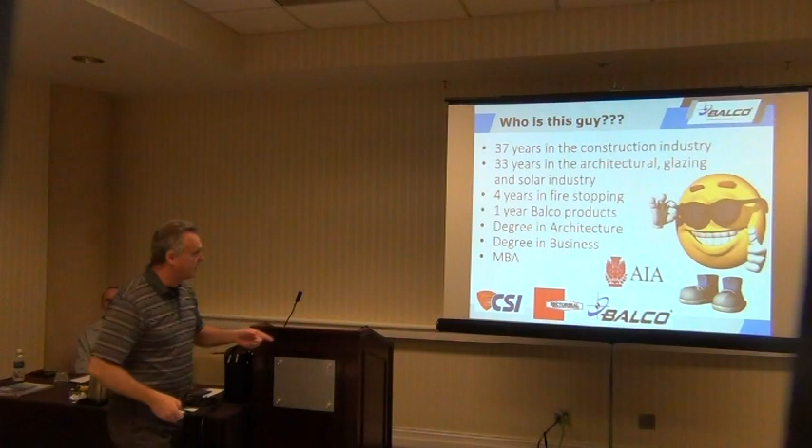My name is Scott Benson, and this is my resume up here. Your program will say Joe Bidwell. Joe left the company a couple, 3 weeks ago, so as they say, I'm the draft pick to be named later. So that's who I am.

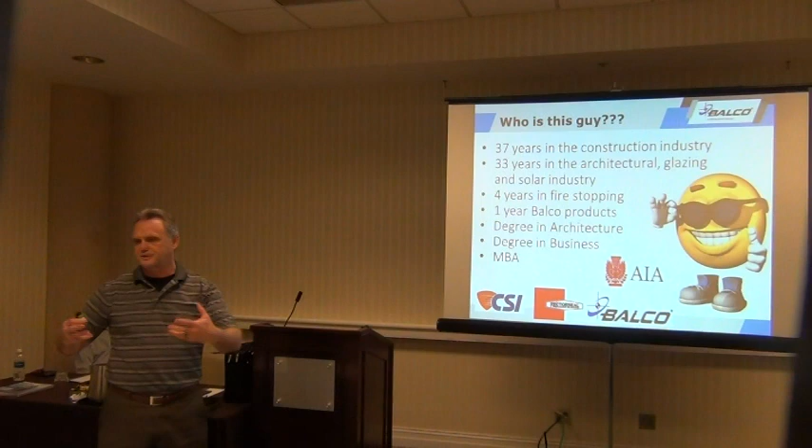I've spent a lot of years in the construction industry. It started when I was a very young person. My dad was an iron worker in Chicago, a union iron worker. I grew up seeing plans in the back of his pickup truck and all kinds of stuff for reinforcing concrete. I worked with him one summer, and that was all the incentive I needed to stay in college. It was definitely something I did not want to go out and do like he did to raise us. So I elected to stay in college, which made me a glutton for punishment.

I did earn my degree in architecture. When you graduate, you know one thing, and that's how to get to studio and produce work, and you leave. So I wanted to know a little more, so after I graduated I went back to school and stayed for a while.

So really what that does is allow me to bring all these parts and pieces in here and talk to you guys about expansion joints. That's what we'll do for the next little while.

Just so you know, Balco is a local company here in Wichita. The manufacturing, nearly 100% of it, is done here. What I do for Balco is work with architects and engineers. I do the same thing for one of our sister companies, RectorSeal, a fire stopping company based in Houston. Someday I'll have Greco aluminum railings responsibility too. So when I go into an architect's office, I'll say, hey, I have this, this, and this. Here's my portfolio. How can I help you guys?

Then one of our other companies is Smoke Guard. If you're familiar with them, they make a unique product with a curtain that comes down to keep smoke either in your room or from coming into your room—elevators, things like that. It's pretty cool. But we're all held by one umbrella called CSW Industrials, a Dallas, Texas company.

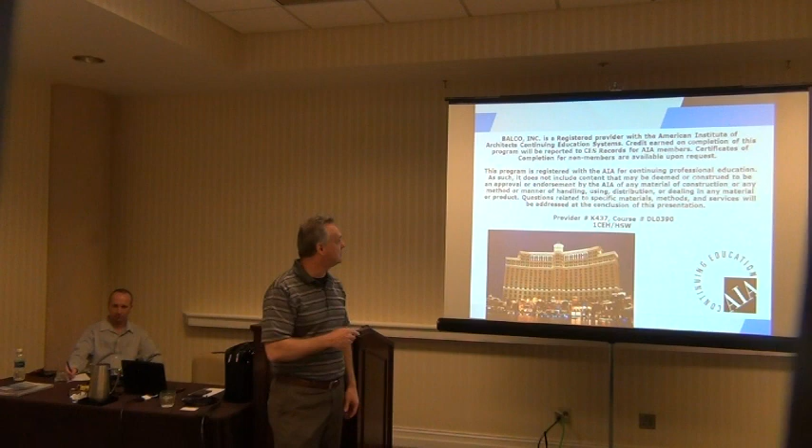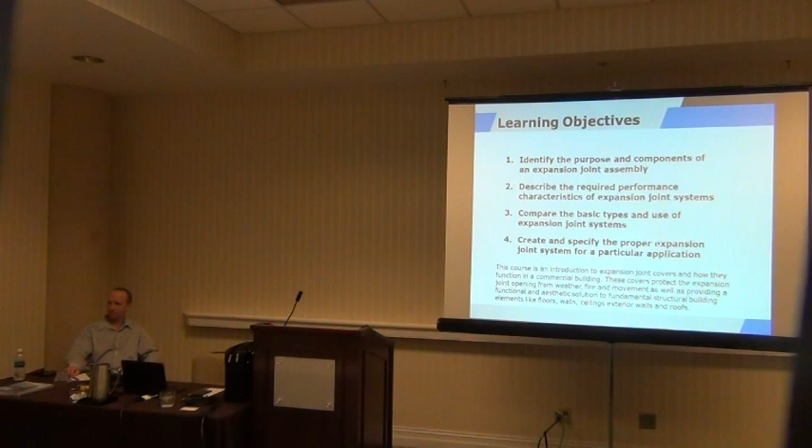I have a lot of parts and pieces up here. This guy is too heavy to pass around, but I'll move it over towards the center in just a moment. The rest of them are pliable and fairly harmless to handle—no sharp edges except maybe on the aluminum products. So we'll take a look at these as well. If you want me to pass them around, we will. If you don't want to see them, I'll just lay them out here and you can take a look whenever you feel like it.

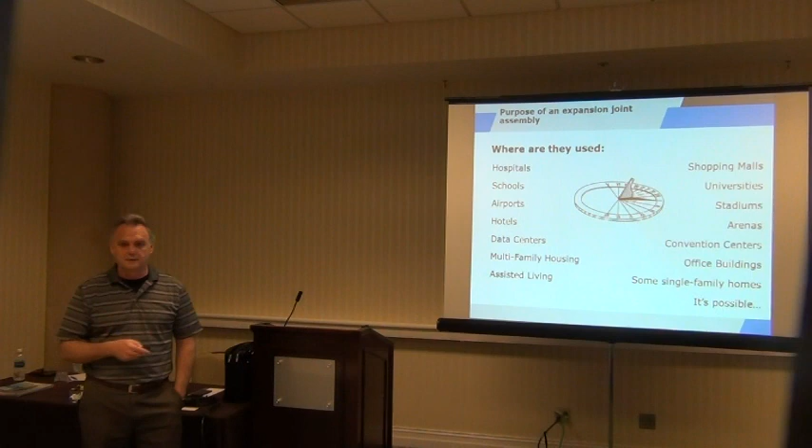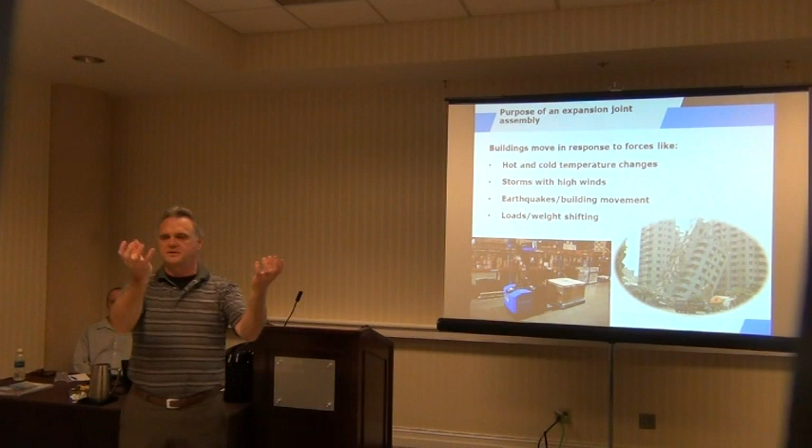Expansion joints go into commercial projects—just about every commercial project, buildings like this, airports, large hotels, resorts, those types of things, any type of commercial project, and some single-family homes, believe it or not, will get an expansion joint. What does it do? It allows the building to move—temperature swings, storms, the earth moving, all of these things can happen. So you have one large building broken up into several different pieces so they can move independently, which is what the expansion joint does.

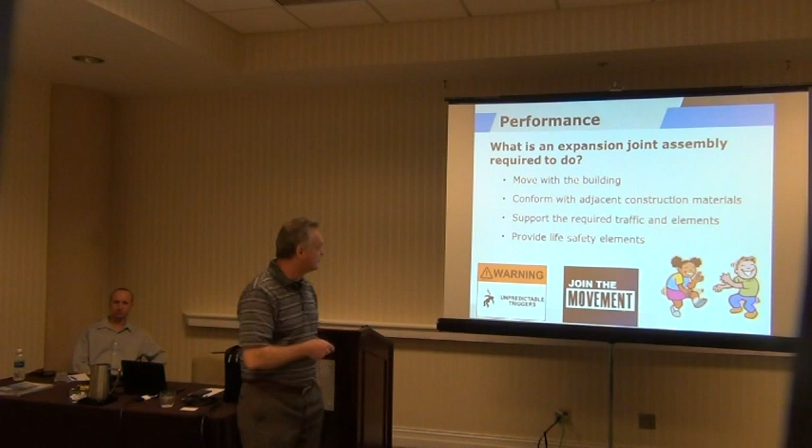That's to conform with the adjacent materials, so it's not just this material we want to talk about—we want to talk about all the other materials around it as well, and that assembly we're going to discuss in just a second. Supporting the required traffic elements is something big—we'll see an issue that came up with a project here in just a little bit. And then, of course, the most important one: provide life safety.

Fire ratings can be added to these items as well, so we'll talk about that. That's more towards the end of the session, but we'll go ahead and talk about it also.

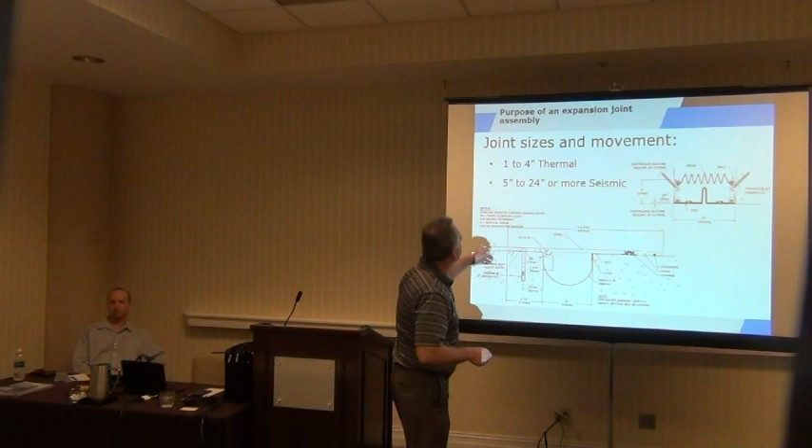So now, joint sizes and movements. This chart stated that anywhere between 1 and 4 inches is thermal movement. Some can argue that. You could say really up to 2 inches is a caulk joint. In California it is, because that's what they do. If it's 2 inches, a lot of times they're just filling it with caulk. Of course, that's probably a tube of caulk every foot, but that's okay because we sell sealants also. So that's good. But they have other seismic movements that go from 5 up to 24 inches.

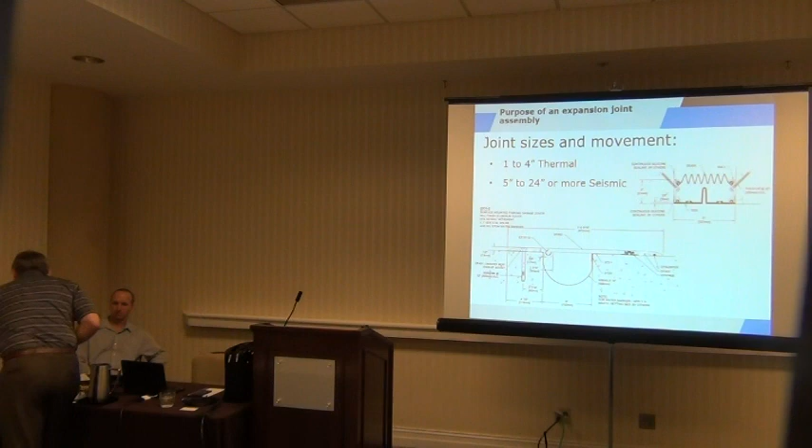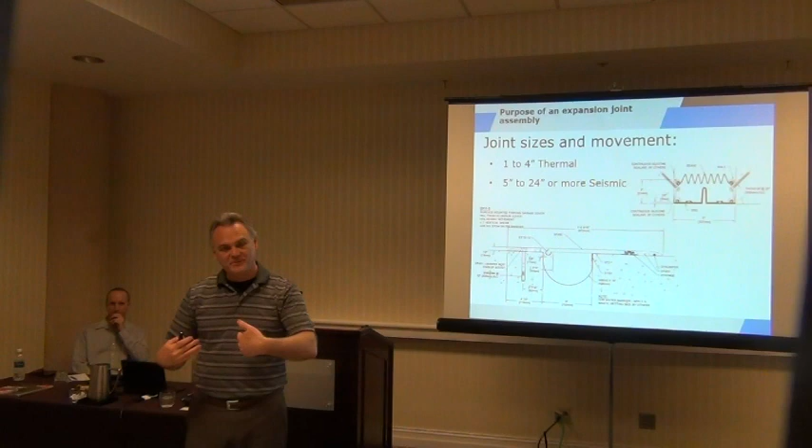Is 24 inches the maximum? No, it can go well beyond that. I was looking through our catalog yesterday. They did a great job creating this catalog for us. And I'm looking through it and I'm going, well, everything's stopping at 8 inches. Everything's stopping at 12 inches. Why? And they said, oh, don't worry about that, because we've done up to 36 and 40 inches before. All you have to do is talk to us about it. So when you see things like this in these catalogs, and they're showing you their maximum dimensions that they can do, don't worry about that. Draw what you want to, and then let us figure that out. And if we can't, then we'll come back to you and say, all right, well, here's our limitation on this condition. We'll take it from there. But that's what makes the job fun, the challenges.

So now, I'm originally from Chicago. I live in the St. Louis area, so I always do things to keep your attention. So how do you divide up a building and show it? I just showed a block of cheese. It's a piece of California cheese. It's not from Wisconsin because I'm a Bears fan. And we don't like the green and yellow team from Wisconsin, so 11 months out of the year we don't acknowledge them. February just ended, so now I'm into the we don't acknowledge them phase.

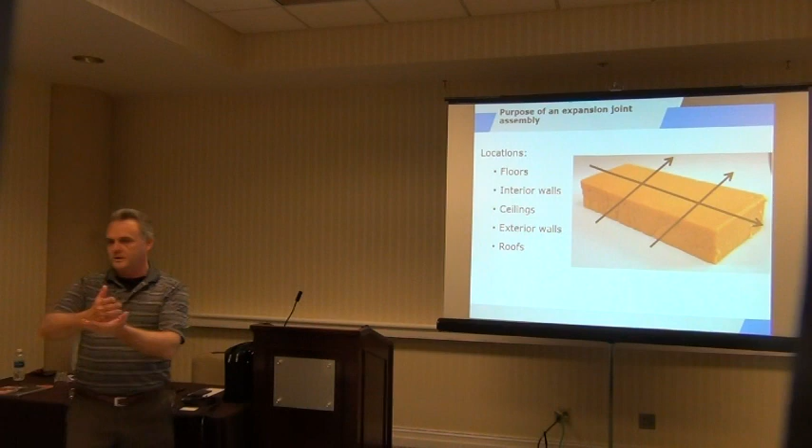So here's what they do. They take this one large building, create sections, let the pieces move independently, but cover all of the gaps. So that's what we're going to do. But it goes through the floors, the interior, the exterior walls, all the way through the ceiling is what you have to do.

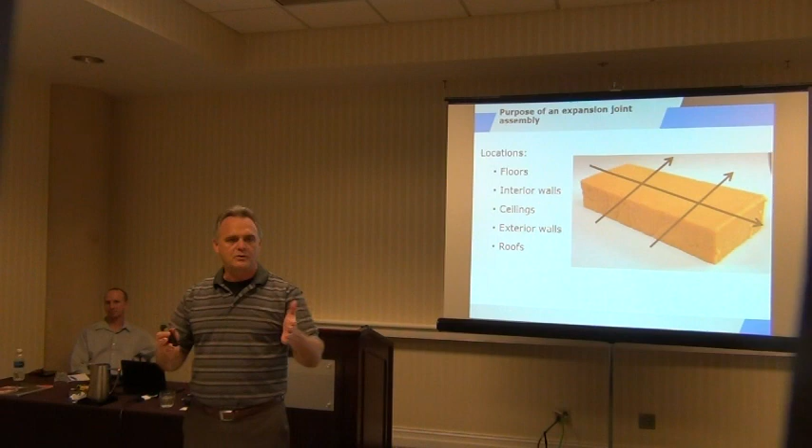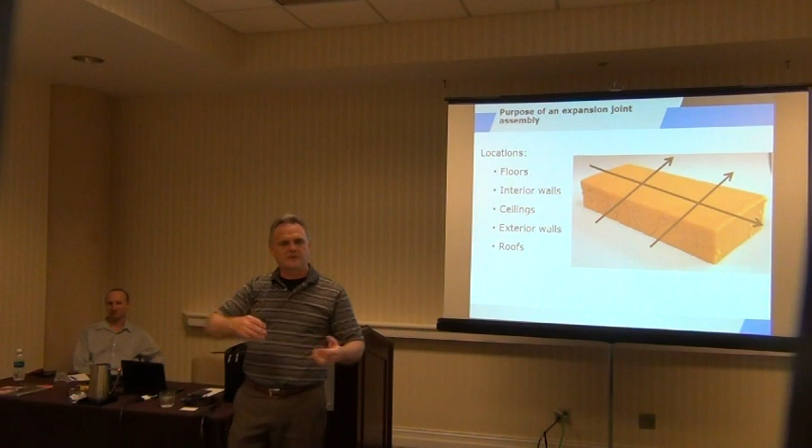So now, is it a straight line? Is it one simple array? Not all the time. Tony and I, this is Tony Hull, a co-worker of mine in Wichita, he came over to answer the really hard questions. So challenge this guy. But we were just talking about this and slicing through. I showed it as a straight line, but it's truly not what's going on in the design world now. Now they want irregular shapes. And so now the line doesn't go straight through the building. It'll go this way and turn, make a 45-degree angle, make another turn, do all these things. So it creates more challenges for Tony, for us, and for the architectural world. And then for contractors to actually build it and install it.

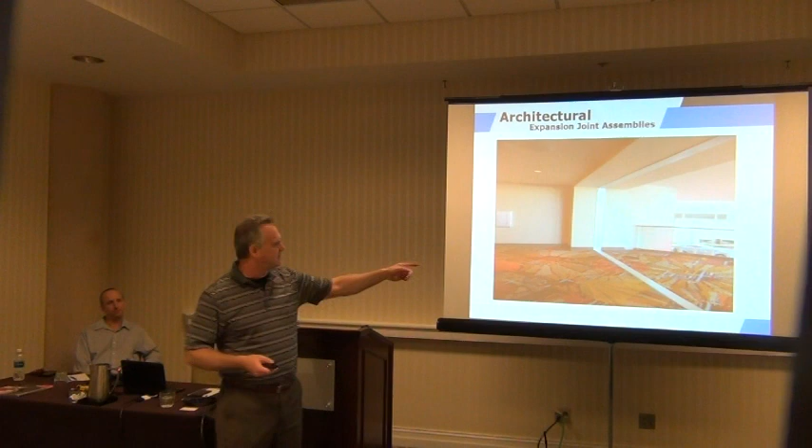But does it have to be as obvious as that? It does not. There are components that we put into the assemblies that can hide these things. Make them a little less noticeable is what makes it great.

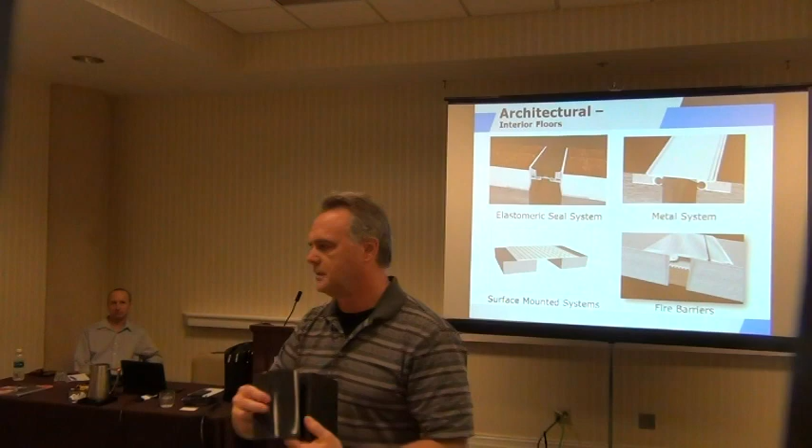This is a Santoprene material. Silicones are available, EPDMs, other things like that are still available. I'll go ahead and send this around so you'll get an idea of what this is. A lot of this can be used in floors. It's used in walls quite a bit.

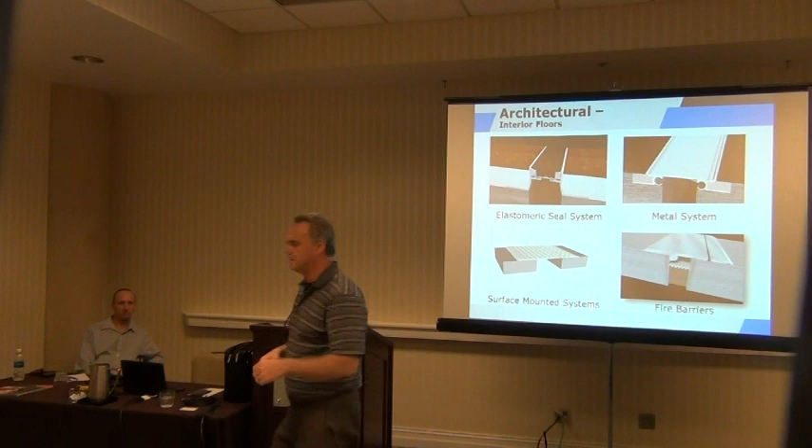So floors, a couple different types. The other type is the one on the right, more of a straight aluminum system. That's what this is, it's all put together. You can mess with this one. It's not a static piece, so you can accordion it and watch all the parts and pieces move. We'll go over the names for these parts and pieces in just a minute.

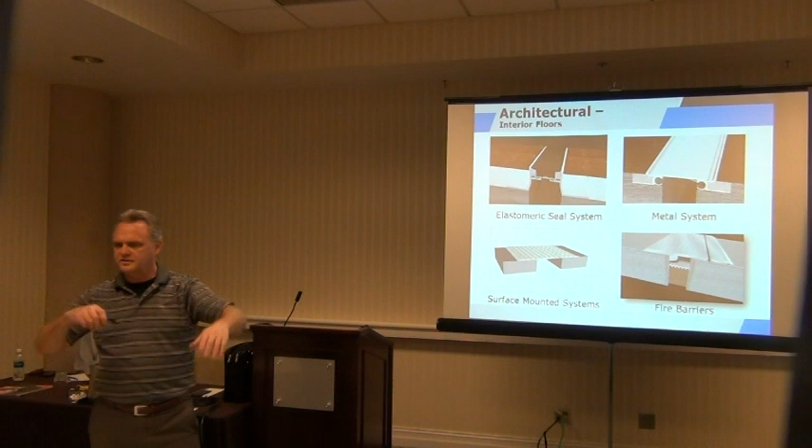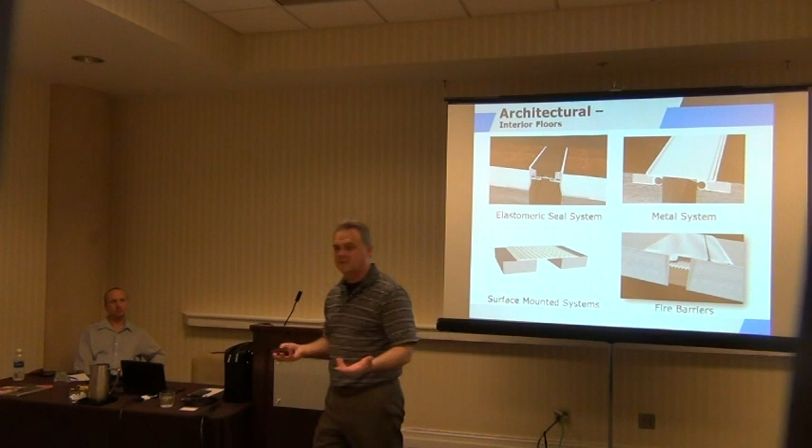These are all systems that would be recessed into their areas. You also have surface mounted. So if there was an existing project where everything's already in place, you don't want to hammer out and re-pour concrete. They have surface mounted systems that you can just set and place right on top of the concrete or whatever the substrate is. Then there's also heavier systems. This happens to be for a garage, and it shows the fire capabilities of this, its ability to stop the spread of smoke and flames. So these things are all available.

So now here's a picture of what's going around right now. A couple of terms: you have a cover plate, you have a center bar. If you look right down the edge of that, you'll see a center bar inside there. As that is accordioning back and forth, that center bar comes into play. So that's what holds everything together.

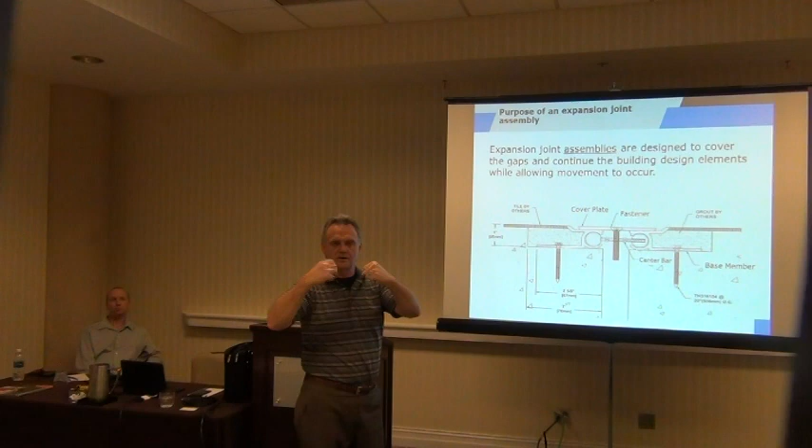Once it expands, it can also contract and come back. Then you have the base member, that's the bottom piece, and that is recessed into the concrete. So you have the concrete here, they have a block out, and all of that assembly is installed after the fact. They pour all this concrete, they pull the block outs out.

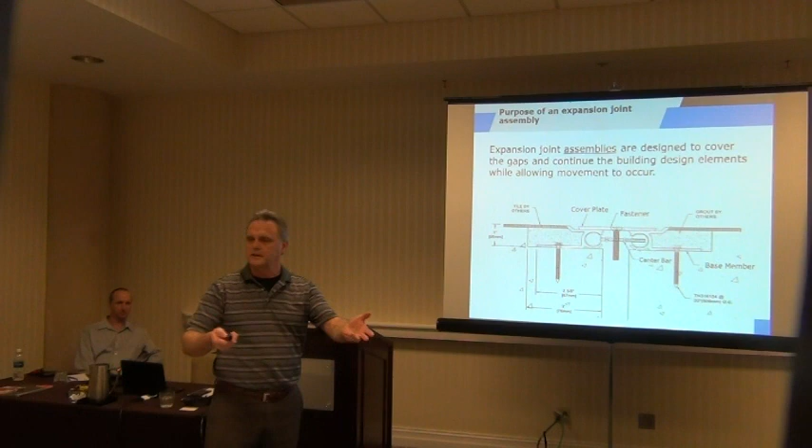Later on in the construction phase, they can go ahead and install the assembly. So now, this just happens to be a different assembly down here, but the same thing - it's a recessed part right here. So the base member, cover plate - this doesn't have a center bar, just a different system, as opposed to a cast in place.

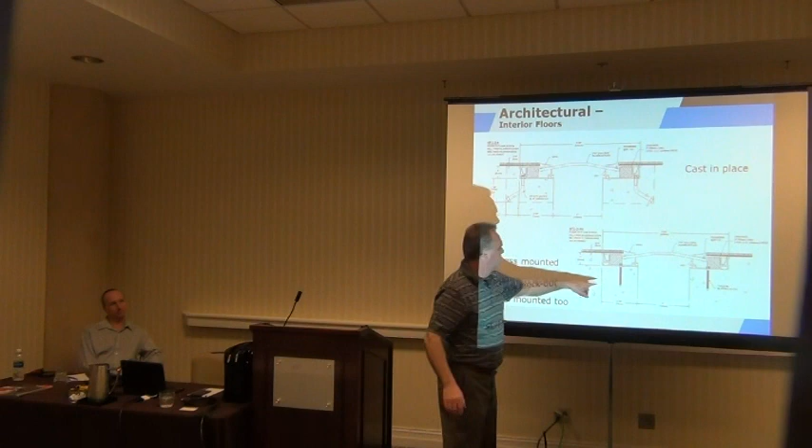The problem with the cast in place is that really the problem is you have to cast it in place. That's the issue with it, because now it's in place. Years go down, something happens, maybe they had an earthquake that damaged the assembly, so now you have to remove it. That cast in place is going to be very, very difficult to remove and try to replace. Where the simple recess system - pull the fasteners, remove all the parts that are bad, replace them with new parts, put your fasteners back in, and you're ready to go. That would be much, much more difficult with a cast in place. So we really don't see cast in place done very often at all.

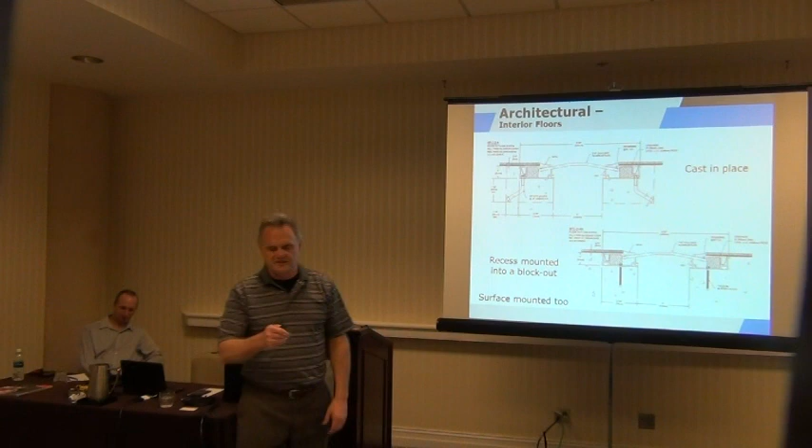Do you have any idea what the percentage of business would be covered within a few single percentage points? 1%? Yeah, so it's almost never done. There would be that unique time where you would use a cast in place, but it doesn't happen very often.

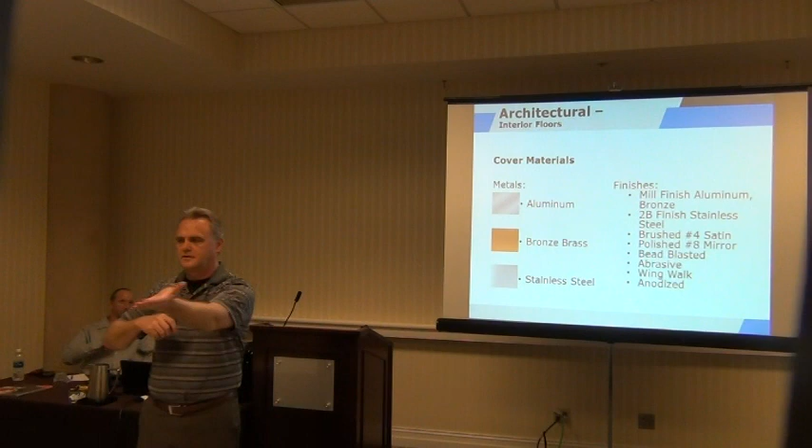Finishes - really any type of finish that you can imagine is available in colors. You could go with a brass cover, kind of soft, but also bronze, aluminum, stainless, anodized, any of these things. If you wanted it primed so it can be painted, you can do that. There are recess systems where the cover actually has a recess on it, so they can place the tile or the carpet right onto that cover plate. So it continues your view and minimizes the distraction of your view with that expansion joint.

I always got a kick out of 'wing walk.' You guys know what wing walk is? What a term to put on there for a finish. Isn't it an abrasive finish? Yeah, that is what it is. But I don't know why they just didn't call it abrasive.

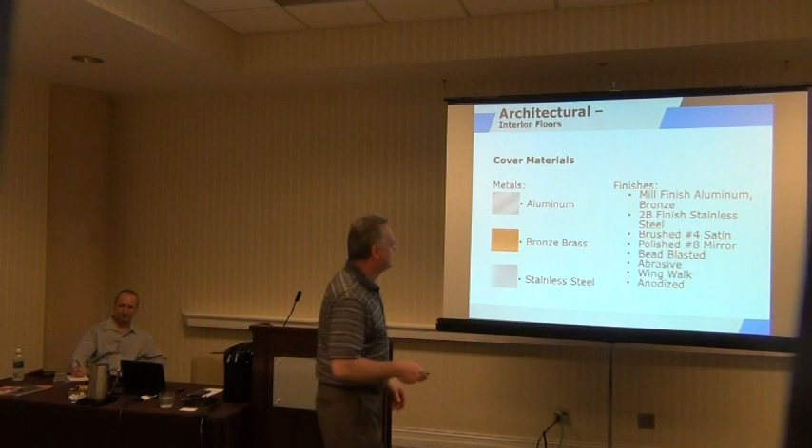That would have been a good idea. But it's something different, so they call it wing walk. I got to keep that.

So now, loads. This is something that's big with expansion joints because you have pedestrian loads, you have different loads, heavy duty, you have vehicles rolling over top of it, gurneys in hospitals, you could have a high lift in a convention center. When you walk down the hallway here, you'll run across an expansion joint, and maybe they run their high lift across there.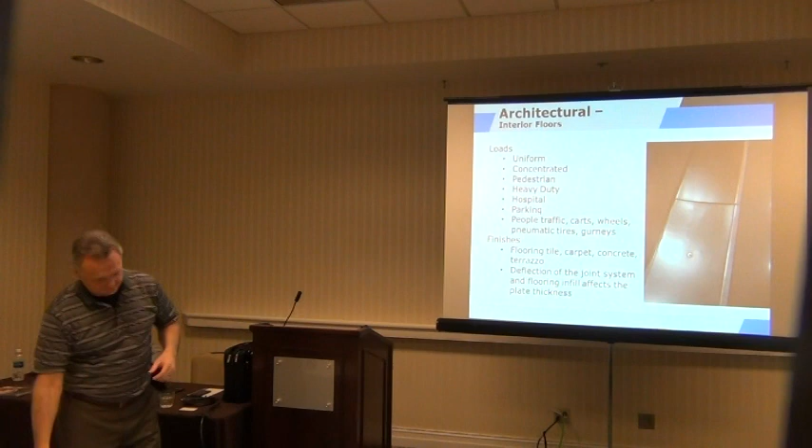Maybe the floor is not set up for that, so they don't allow it. But it didn't stop them in this building from running over top of that cover. So now if you notice, it is a concave shape. That's because it wasn't specified properly, or it was specified properly and then somebody drove something over it that wasn't supposed to go down that hallway. Maybe they weren't supposed to drive a forklift across that. They did concave the cover.

So specifying and having the occupants stick to that is always going to be a challenge.

So here's a chart that was created. It's on the last page of our catalog. Here you can see when the design loads are created, a pedestrian is a 300-pound live load with a 2x2 space that they're occupying when they walk. You can go right down the list and see all the other things.

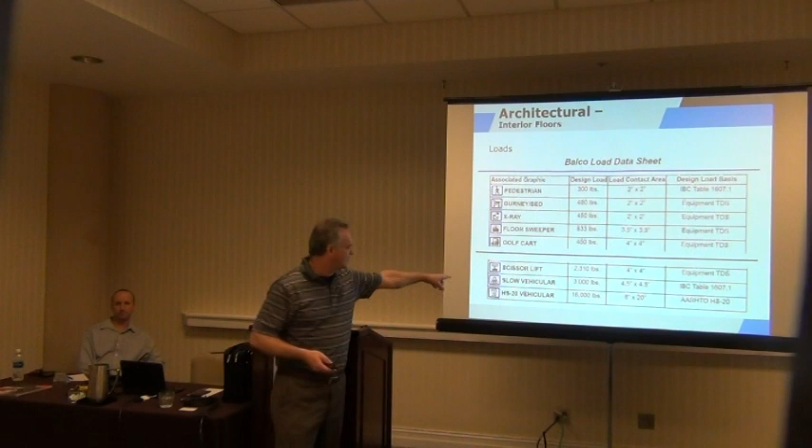So that picture prior, they probably specified this, and somebody did this. And that's a bad thing in our industry. Can it be fixed? Absolutely. So all those parts and pieces can be removed, primarily the cover plate, maybe the center bar. And then they'll reattach a thicker cover plate, something like that, to make that joint better and so they can drive their scissor lift across it.

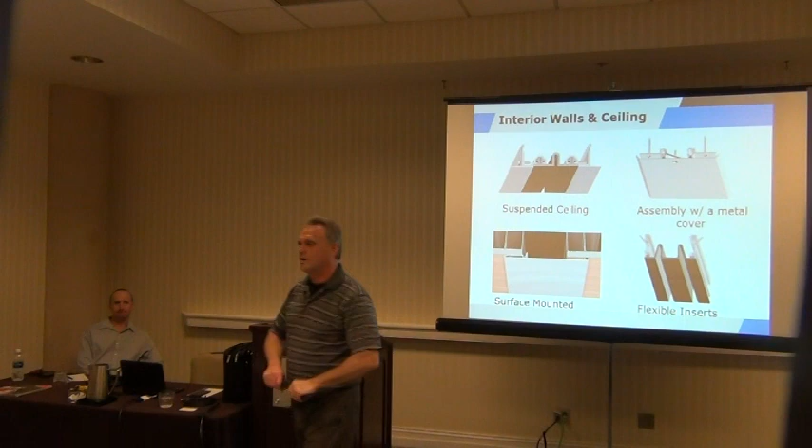What do we have? Interior walls and ceilings. So we're looking at the same thing. Here's another part that you can work with, we'll send this around in just a second. But really you're looking at the same parts and pieces, maybe more dense, more durable, thicker, same thing. You have your EPDM, silicone, Santoprene, you have your aluminum covers, surface mounted, flexible types, all of those things are available. So let's take a look at those.

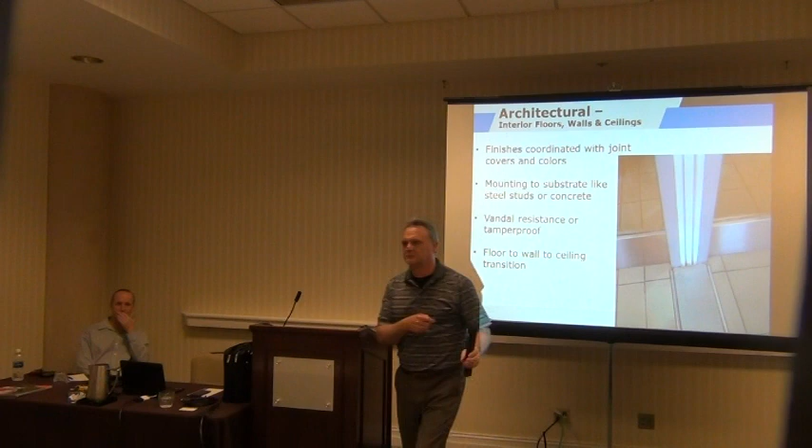Here, we're looking at a picture where the aluminum cover plate is coming up to a Santoprene wall condition, so you have to be able to transition that properly. We'll show you the drawings for those, because we'll give you a drawing of the floor system, a drawing of the wall system, and a drawing of how they transition to each other, because they have to still sit there in harmony since they're all going to move around independently. So we'll show you that drawing as well.

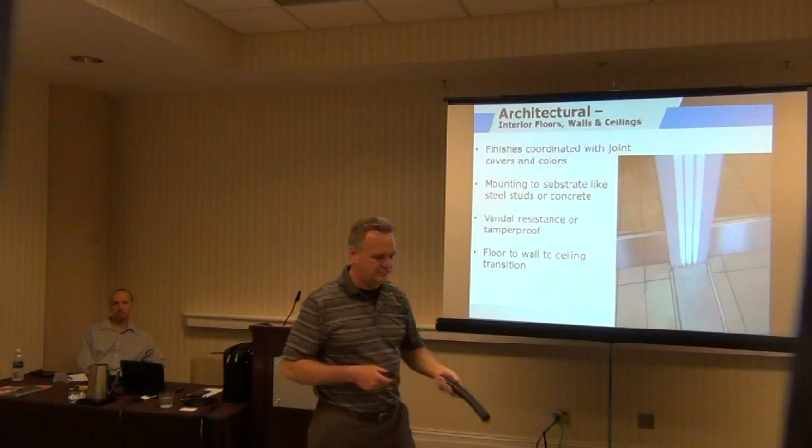But some of the things you have to look at if you choose to use something like this, I'll go ahead and send that around. First of all, you have to deal with the substrate: steel studs, concrete, wood, possibility.

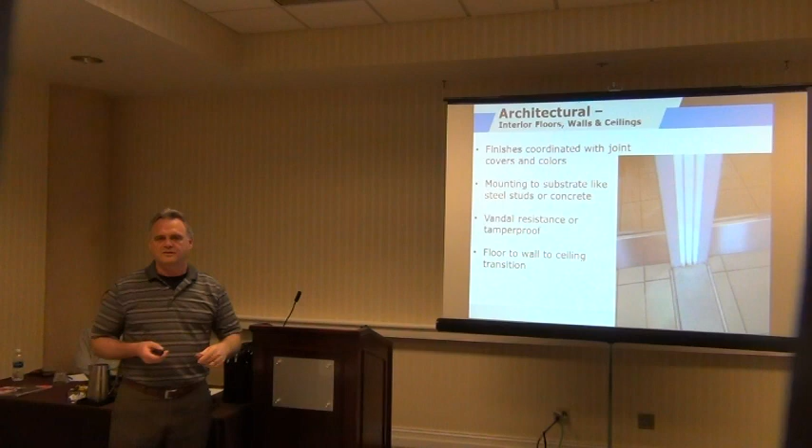But also vandal resistant and tamper proof. So if you're going to have something like this in the hallway of a high school, be ready, because as our little darlings are standing there with nothing to do between passing periods, they have their pen or their knife out and they're picking at this kind of stuff. It's not going to withstand that. So these things have to be taken into consideration. That would be one condition where you would not want that in a high school hallway, for example. Use a metal system similar to this or that.

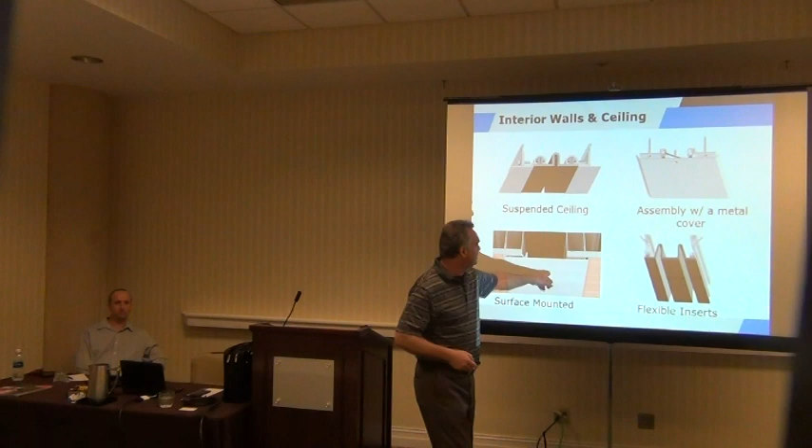And then, of course, colors, which we alluded to earlier. All of these colors are available. If there's something that you don't see in a color chart, all you have to do is ask your manufacturer, because most likely they have custom capabilities. If they don't, go ask a different manufacturer.

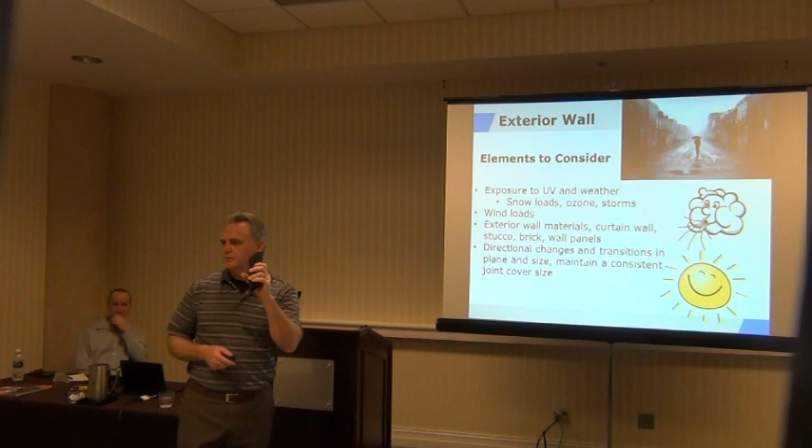So now, with your exterior walls, exposure to the elements is huge. Santoprene's great on the outside, but silicone is better. So if you had a silicone exterior joint, it's going to withstand the elements - wind, rain, the sun is a big part of it. But you have to take those things into consideration.

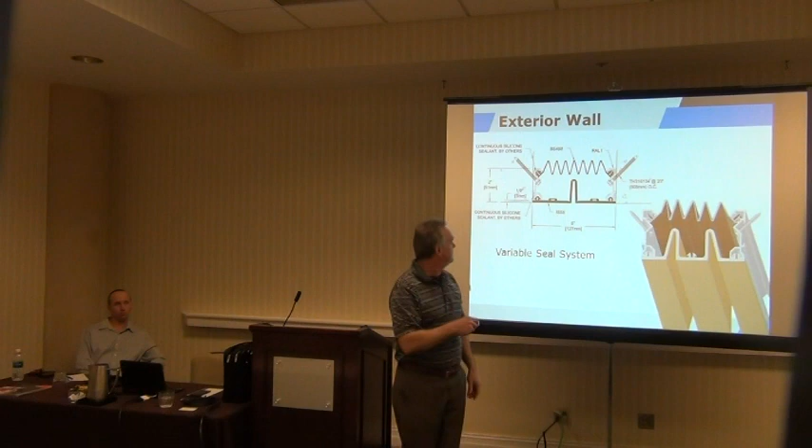Here's a shot of the exterior walls. Really, you're looking at that first piece that I sent around, this is what you're looking at here. I pulled it out of the frame itself. But they're using silicone here. Again, the best benefit for silicone is sun exposure. The second best thing about silicone is you can do very, very long runs - up to 100 feet with one piece of silicone. There's no joints. The joints, obviously, can let water in at times, you never know, but you get nice long runs with a silicone product.

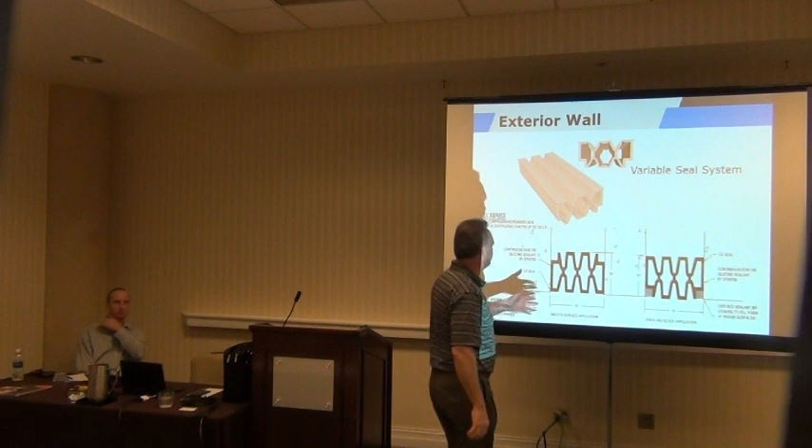That piece that's going around is exactly what this piece is right here. You'll notice that it has a notch on the inside. You have a nice smooth surface, you can have that notch facing in, minimizing your sealant right here and here. However, if you have brick, split face, concrete block, anything like that, you have a few idiosyncrasies in there. You may have some irregular shapes. All you do is take that piece, flip it around, and now you have a nice bed of caulk right there to accommodate all those changes that may occur in the construction phase. So those are pretty handy.

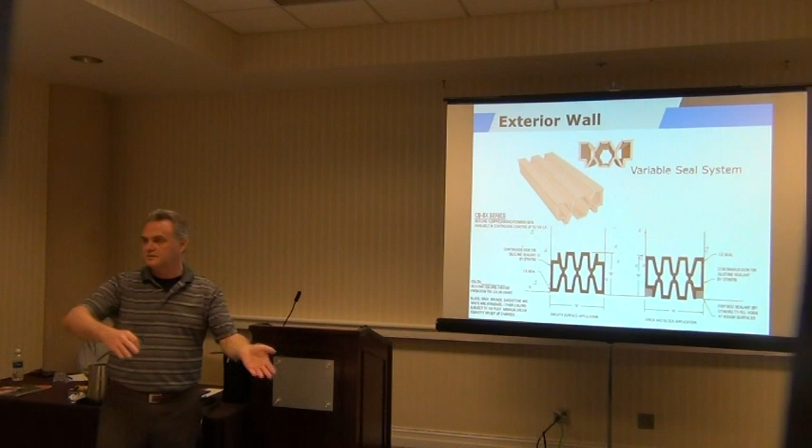So all of these systems are available to meet your needs. There's not just one, and you open the book and go, okay, how can we make this different to accommodate them? All of these options are available to you guys.

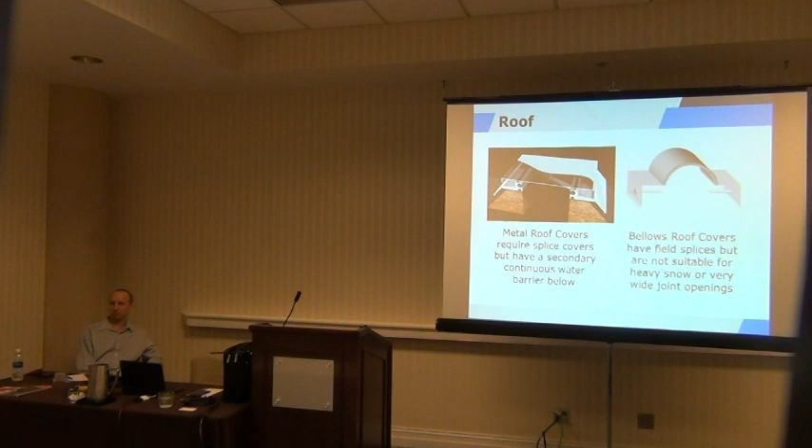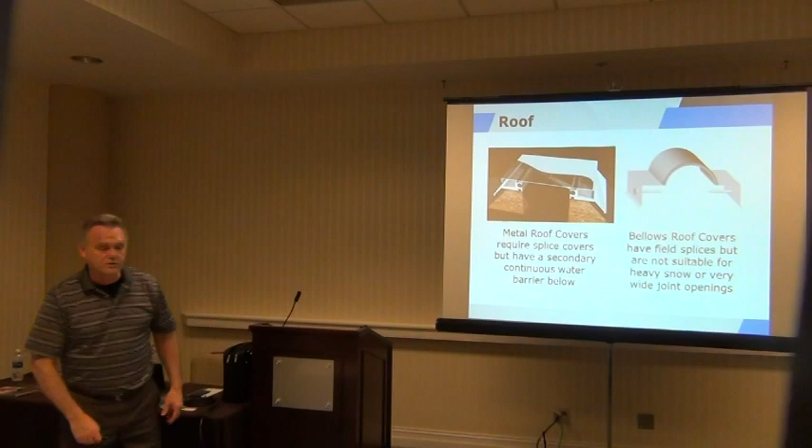So now you go through the roof. A couple different types. You can work with a metal cover, which is very similar to one of the systems we passed around, or you can work with something like this, the bellow type. So you'll have the cover. You'll also have something to catch water and run water away, should the water get through that system. What you're going to look at here, though, or what you're going to consider here, is if people are going to be on the roof, you're better off using a system like this, because if you step on that, that's bad. It's going to concave, you're going to have problems.

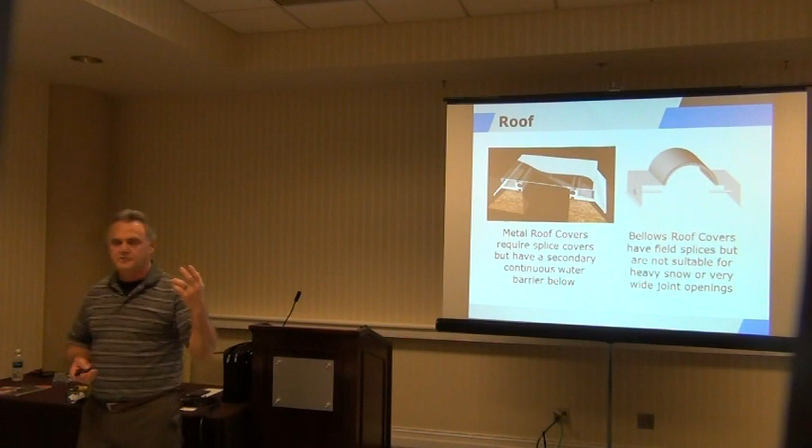You'll have to have somebody come out and most likely repair that expansion joint. So loads, sunlight, snow, rain, pedestrian traffic, all of these things come into play. Really, it starts from, again, the joint that goes through the floor, goes up the walls and through the ceiling. All of these same considerations are being taken into play.

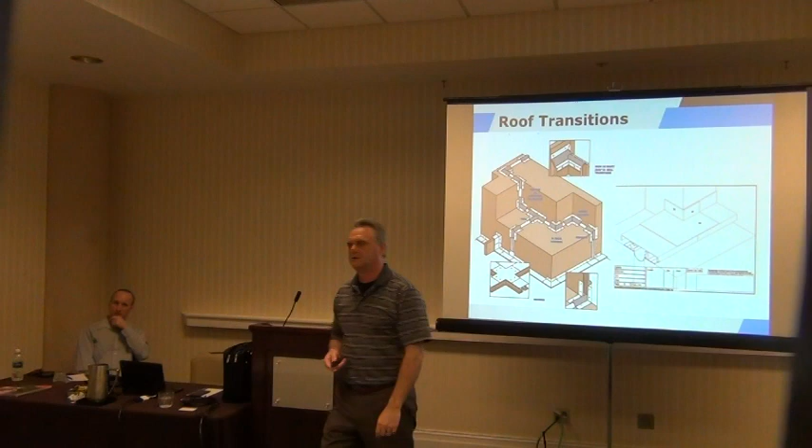So now, if you have transitions, these can all be manufactured in the plant, sent out to the job site. A drawing will be created to show you all of these different transitions. And then what they do in the field, there is a kit that's provided, so then you place the straight runs together.

Parking garages. These are an animal. They're heavy. We won't pass this around. You can come up and take a look at it if you like.

With this system, everything's thicker, everything's bigger, everything's denser, everything's stronger for all the right reasons. That's one example. Here's some other examples right here.

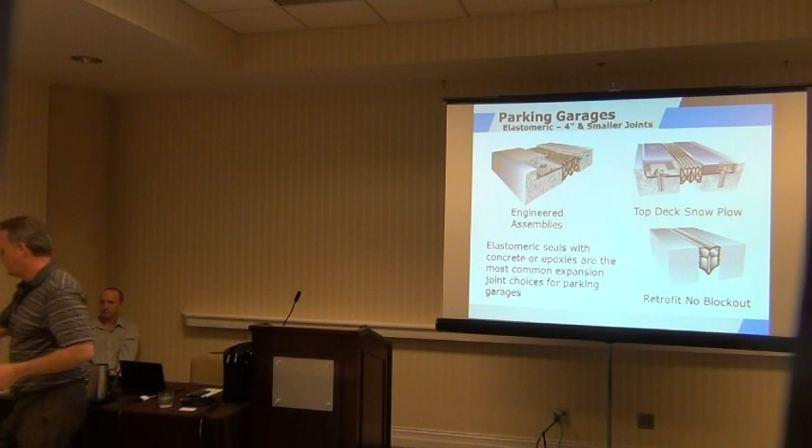So now you still can use santoprene, silicone, these types of things in your systems. There is one right here. This is called a wing system because of the wings on it. This will be put into place, and the rest of the concrete is going to go over top of this. It's an elastomeric concrete that's provided in the assembly kit. But once this is put down in the concrete, they'll flow that, it's like an epoxy, but it's an elastomeric concrete over. Comes up near the edge right here. Gives you a nice smooth transition.

That's just one way of installing these things. If a snowplow hit this, it would tear it out. So there's another option. Up there on the right is what they call a top deck assembly. So now it's anchored. There's a few different parts, but they'll anchor that system in.

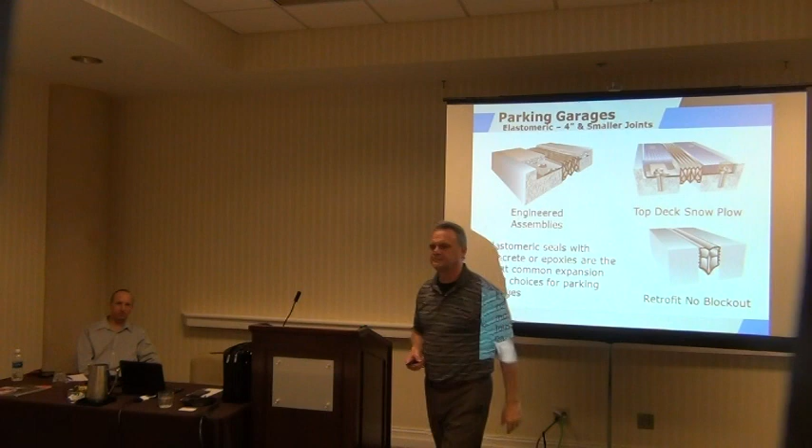And actually those blue items, there's probably a pointer on here, but I'm not going to use it. The bluish purple items are the blocks. That's part of the assembly kit, so those got put into place. So now you don't have that elastomeric concrete. The blade is running across those blocks, which are very, very durable.

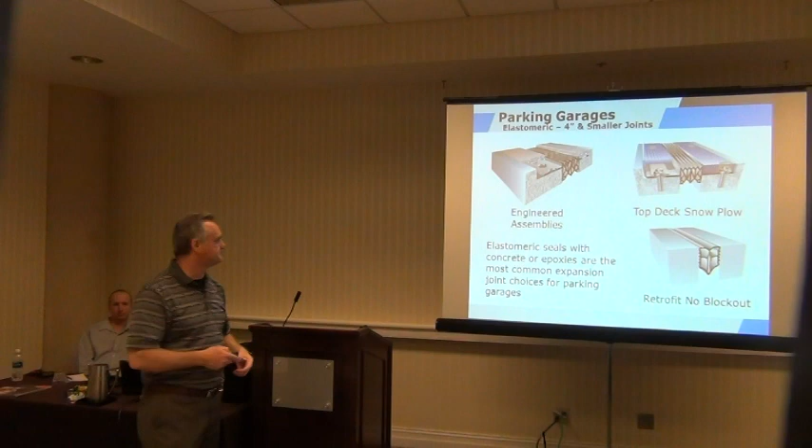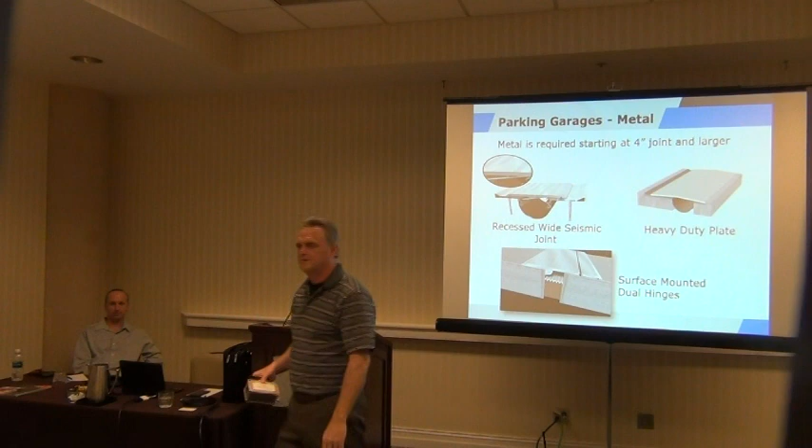Here's the assembly for the aluminum types. There's a fire product shown in this picture. This is called a dual hinge system because you have a hinge here, so it doesn't matter if this slab moves or that slab heaves, the dual hinge system can accommodate that. If it was just a single hinge, when this piece drops, the aluminum piece would pop up, halting traffic trying to get out of the parking deck. With the dual hinge system, it will accommodate either heave nicely, but it also has that fire stopping quality built into the assembly.

This is wrapped in plastic for a very good reason. Don't take your knife out and cut this open, because if you do, it accordions out and grows probably this wide, and it'll never crush back together to get put into a plastic bag. So when they install this stuff, they do it very quickly. Within the assembly, they place their adhesives on each side, get the joint very close to where it's going, then cut it open and set it down in there, and this thing slowly continues to expand out. Once it's in place, it's done. The only way to get it out is to probably chisel it out.

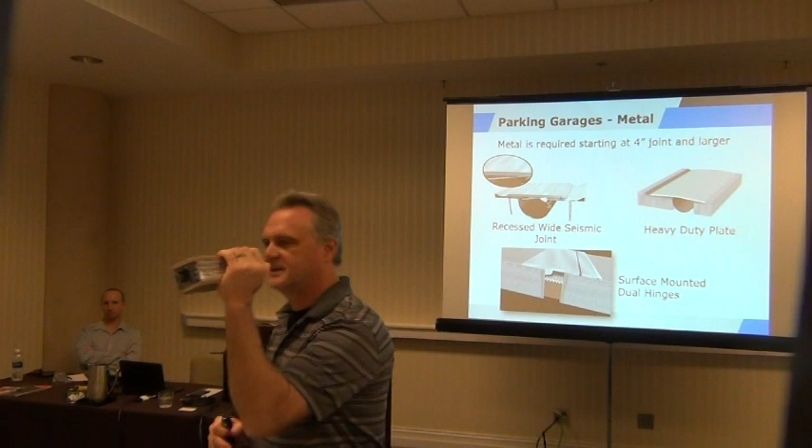You can mess with it a little bit, you can collapse it a little bit, but when that opens up and swells, it becomes a very dense product, difficult to work with too.

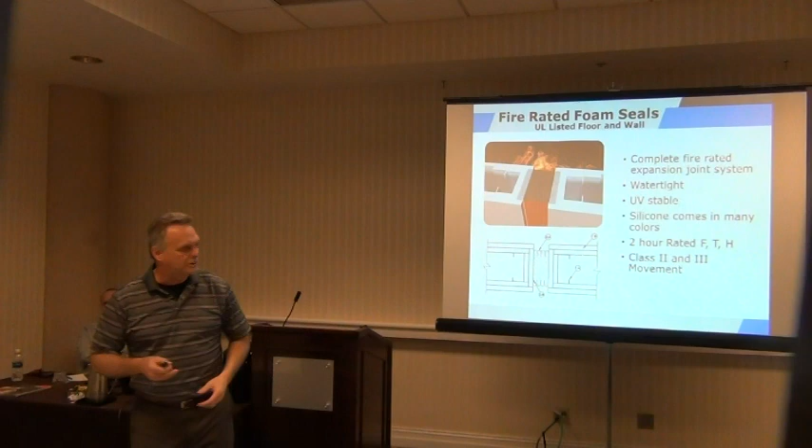So let me jump forward to here. That is that material in place, with 2-hour fire ratings, but it also has the silicone on each side. So you have your silicone on each side. That could be the expansion joint assembly in itself, but if you need a different look, you can cover it up and put cover plates on it, something like that. Here it's just sitting within this wall, and that's what's stopping the flame and the smoke.

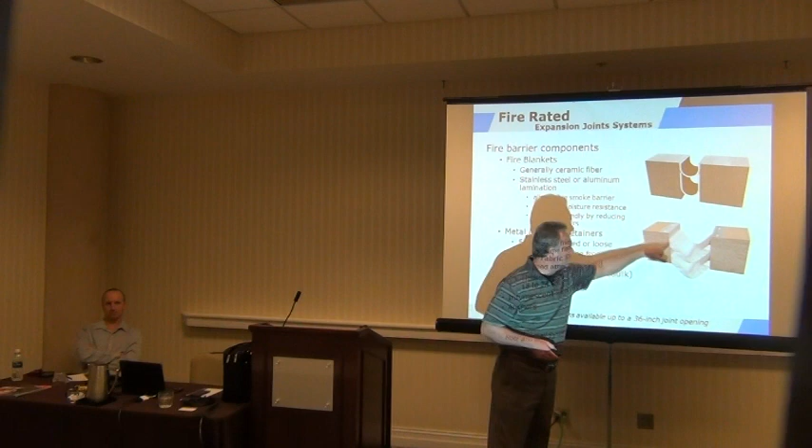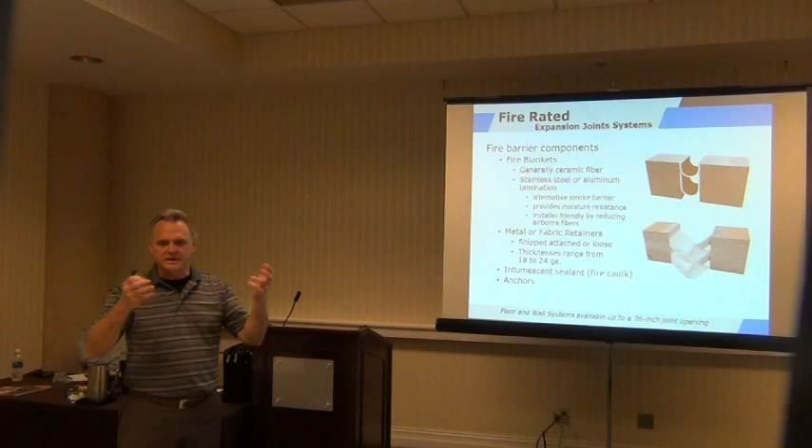Let me jump back a little bit. There are a couple different types of fire stopping products. There's a ceramic fiber layer that can be placed into there. I don't travel with that because it's really itchy stuff. But as you can imagine, it's just a blanket that's placed into there, and it's going to stop your fire from transferring through that joint.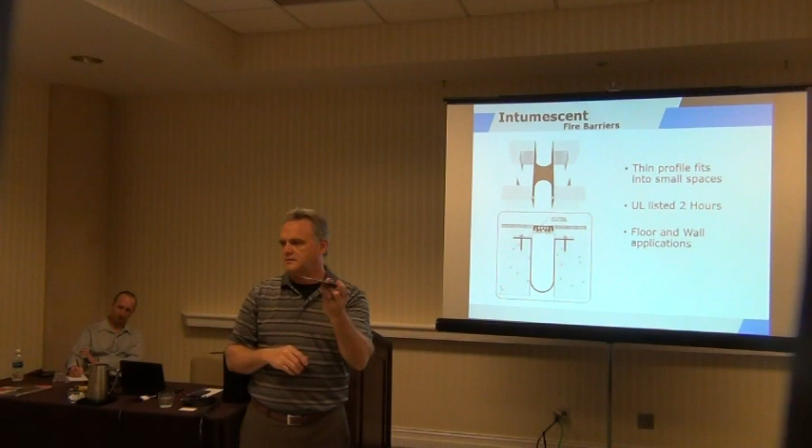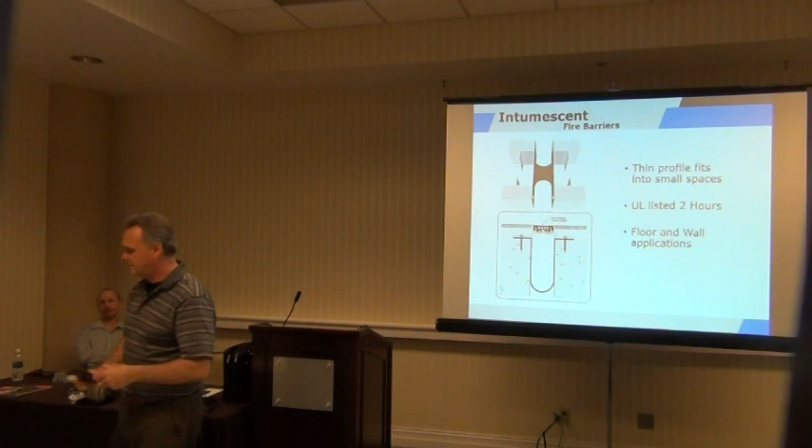There's other types of material. This is an intumescent material, a very flexible layer, easy to work with. It comes in varying widths according to the joint, and can be placed down into there and installed with the assembly. Being intumescent, the base of that word is to grow with heat, so this little 1.5 millimeter layer will grow 30 times its size if you increase the heat 325 degrees above ambient. So it will flood all of that joint with a carbon char, and that stops the transfer of flame and smoke. A very unique product.

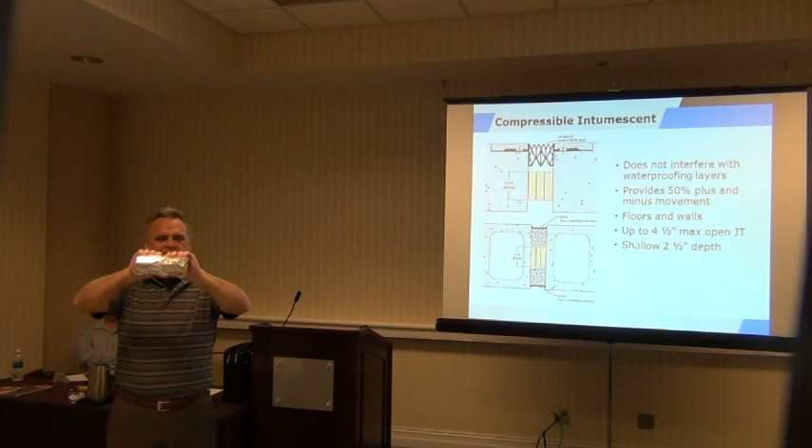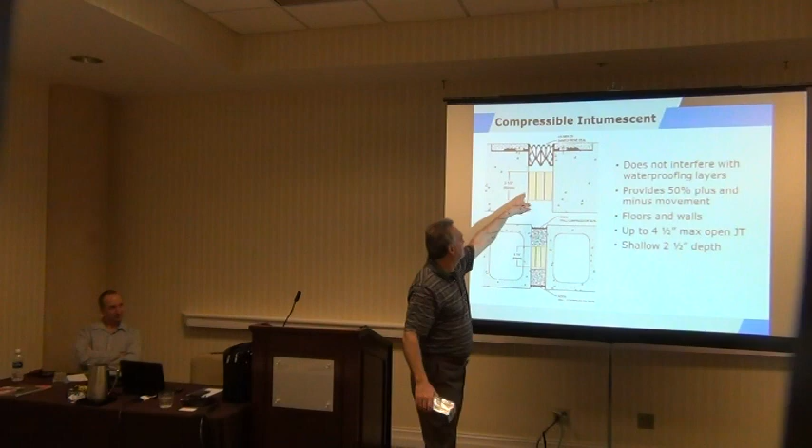And then here's something very new also. This is a foam product used in conjunction with this intumescent material. We can mess with this, we can accordion it. So what you would do is take this very lightweight 7-foot stick and collapse it and place it into the joint, then let go so it expands out. So adhesive or friction fit can be put into place. All they're doing is putting this block into place and then placing the rest of the assembly in there.

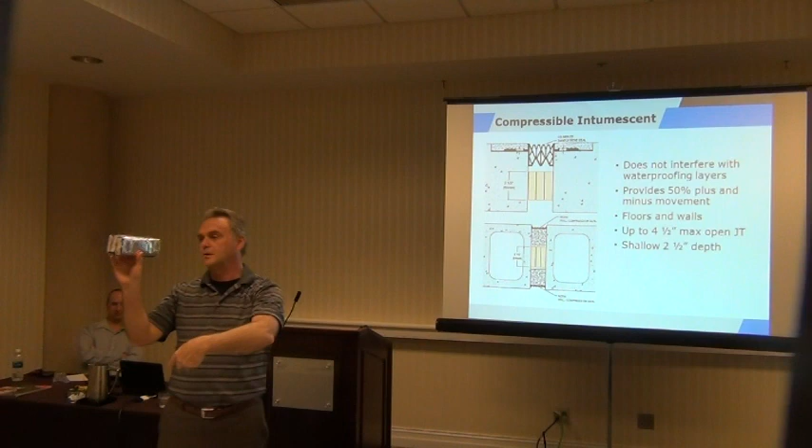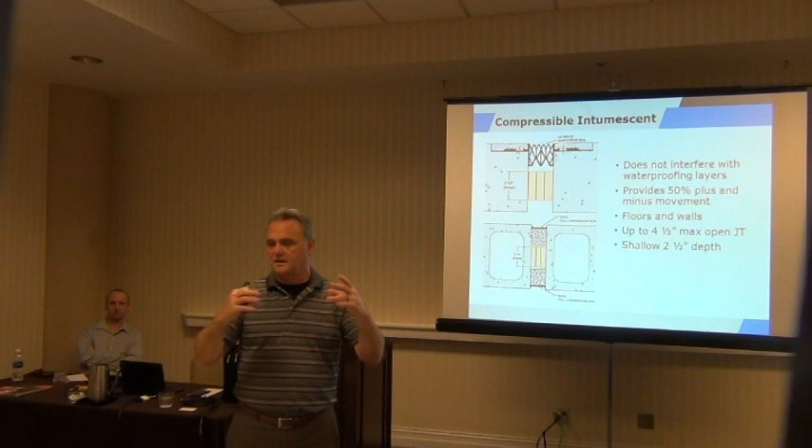So now fire starts either on top or below the assembly joint. This material, once it gets to about 400 degrees, again 325 above ambient, will grow, and it's going to flood that joint completely with that carbon char and again halt the transfer of flame and smoke. So very lightweight, very easy to work with, 7-foot sticks. The other foam product is a 5-foot stick, heavy. You have to be quick when you work with it, it's not necessarily like a nice drop-in like that can be.

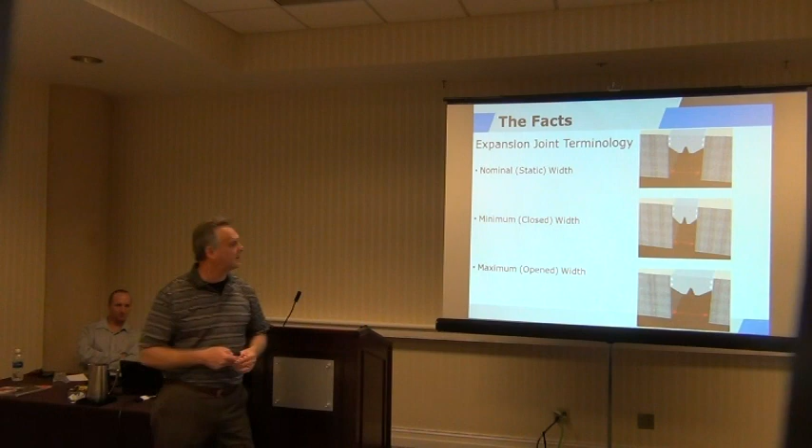So now here's some facts for you. These are some of those things that AIA makes sure I put in on the presentations. You get different sizes of joints.

This joint has certain terms that we use. We have a nominal or static width, which could be anywhere from 1 out to 36 inches. Then you have your closed dimension - does it go down 100%, does it go down halfway, that type of thing. But what is the closed dimension you want to work with? And then what is its open dimension, or the maximum that this joint is going to open to?

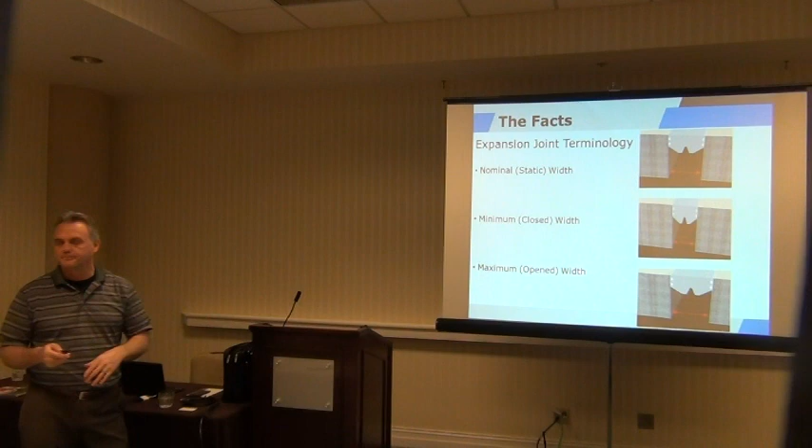We use that in determining what type of product goes into the project - what's beneficial, what's best for your project. So you can have a nominal 2-inch joint. If you have 50% movement, it's going to go out to 3 inches - that'll be its maximum or open dimension. Then you have your closed dimension all the way down to 1 inch. At 100%, you would work with this nominal 2-inch joint - it would go out to 4 inches, then down to near zero. Near zero because there's always going to be material in there, close enough. So those are some of the terms to work with.

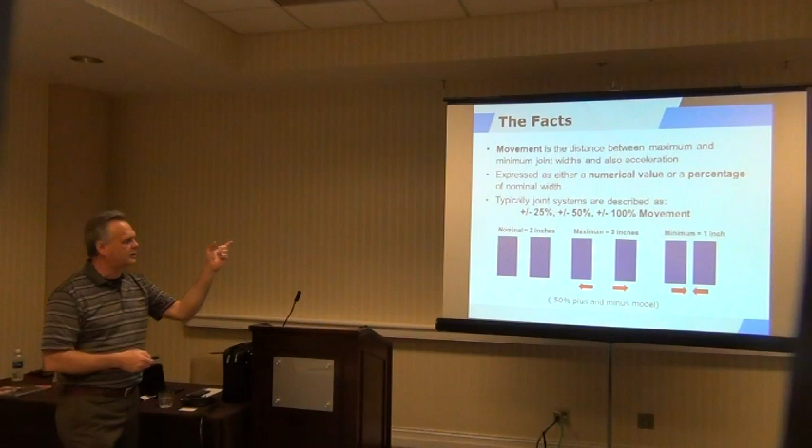There's some testing that goes on, and you can have class 1, 2, and 3 classifications with your products. Some products may meet all 3, some don't - it depends on what you're working with. But if you need a class 2 system, they're going to test that system and cycle it a number of times. That's what the classifications mean.

Just like tires on a car - you have tires that are 30,000 mile wear out, you have tires that are 70,000 mile wear out. I bought a set of tires and said, what's the wear out warranty? He said, nothing, they're run flat tires, they don't put warranties on those. That's kind of disappointing. But same thing, different classifications of tires.

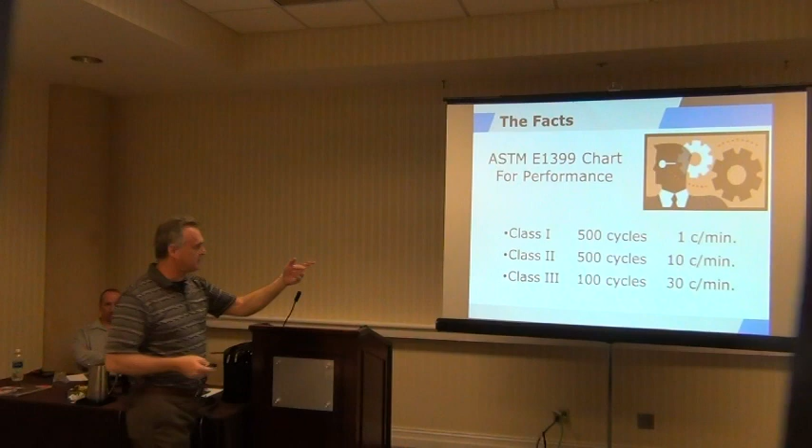So now here are the essentials - questions that an architect or somebody working on the building would ask. They say, I need an expansion joint, and they call me up. I say, okay, here's what I have, I'm going to ask them a certain number of questions - the top questions. That begins to narrow the focus, creates a funnel, and narrows down, and then spits something out at the bottom. A couple, 3 options, maybe one condition came out the bottom of the funnel, it depends. But that helps us in the expansion joint industry get something that will suit your needs.

What I can't do is provide you the bottom information. I can't provide you the fire rating, I can't provide you the joint size - that's information that has to come to me. Then I can get back to you and say, yes, we can do that. You can't call me and say, Scott, I have this joint, but what's my fire rating? That has to come from you guys.

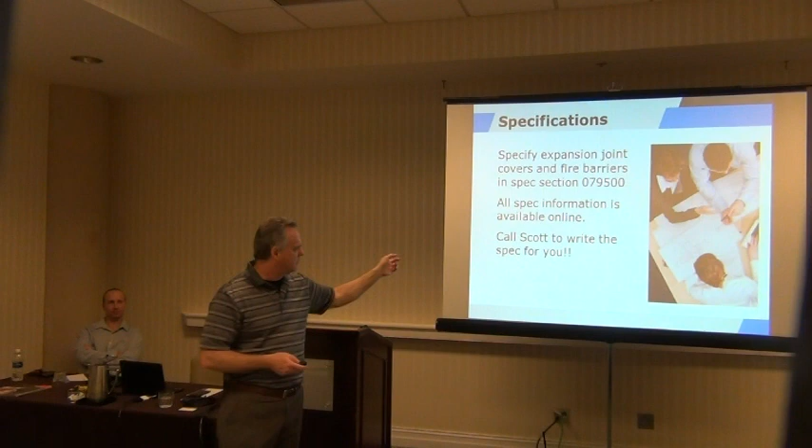Specifications - do you write your own specs, or do you have somebody do that for you? 79500 is where expansion joints are listed, and then they go on from there in the 500 numbers. But if you don't want to do it, give me a call, I'll take care of it for you.

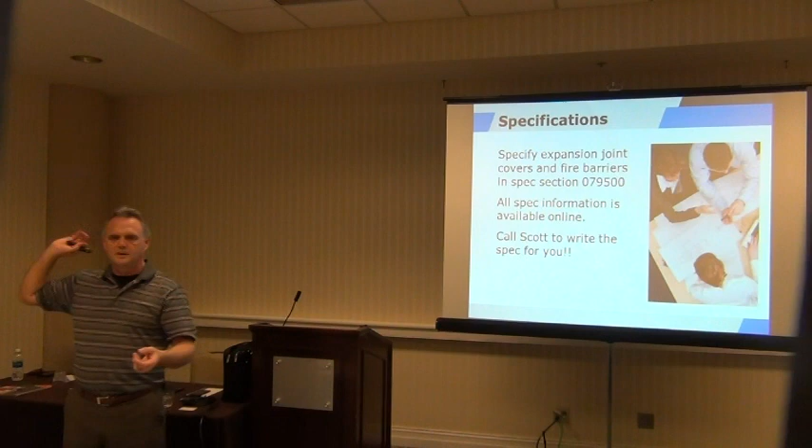I could write it 2 ways. I could write it where Balco is the only company that could bid the job - I can do that, make it a proprietary spec. Or I can make it where anybody can bid the job and let the dollars play out - that's a good competitive bid. I kind of lean towards the latter and not the former, unless I'm told otherwise. On a public project, you have to have 3 and sometimes 4 manufacturers, so I won't play the game of locking out everybody else - unless you ask me to. If you say, Scott, we like Balco, we've used it on 15 prior projects, we use the other guys and can't stand them - that's usually the case. But I can write the spec where only Balco can bid the project as well. So that part's up to you guys.

So now, here's what I want you to remember - I want you to remember me as a resource for you. I have the backing of a lot of people behind me, so I'm like the reverse funnel. I'm on the end, and they're all behind me. So when I need something, all I have to do is ask, and I get my answers.

So I can then take that information to you if I can't give you an answer right away. Remember me as a resource for you. I can help you with your expansion joints, your specifications. We can always talk aesthetics because of my background. If you're going to have a bright, shiny plate in the middle of somebody's living room, they may not like that. Oversimplification, of course.

Products are made in the U.S. The things we've seen here today are made in Wichita. They're right here, they're not going anywhere. They're a wonderful sister company to have in relation to RectorSeal, because if RectorSeal doesn't have it, I can always get something here in Wichita and vice versa. So we all rely on each other, and we can also do that for your projects.

And new technologies - that meta block is a great item because it's so lightweight. The installers love it, it's easy to work with. It's not heavy like the foam block product you saw. That stuff's heavy, that's the old technology. This meta block is the new technology. All right, use that.

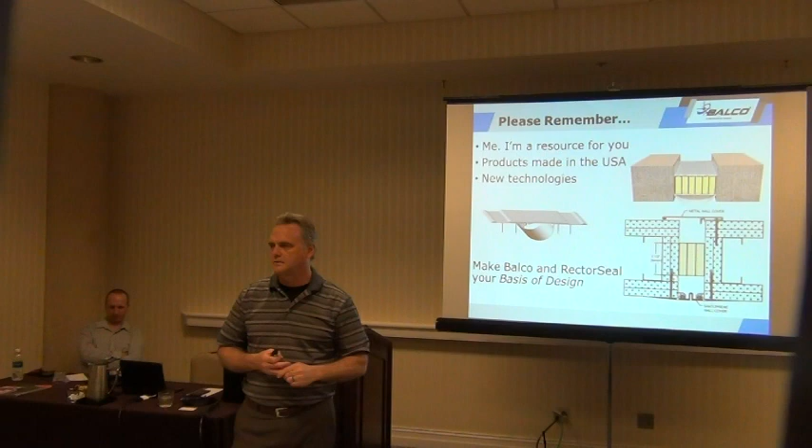But sometimes it could be loading, where the loading was not figured properly. Could be, and so now we have that to contend with. That could be - now we need to provide different parts and pieces. So it's all a part of the warranty that comes with it. The warranty varies according to the installer, it could be a 1-year warranty, it could be a 5-year warranty. If you write in your specification that you need something different, if you want a 10-year warranty on this, that's something that can be considered.

So it's all a matter of what's best for your project, but we're going to look at this also and give our best determination with our technical staff and say, this is what you need. And you go, well, we've had people that say no because that's too expensive. If you go the lesser route, you may have troubles. But we're going to provide you with something that you're going to be happy with.